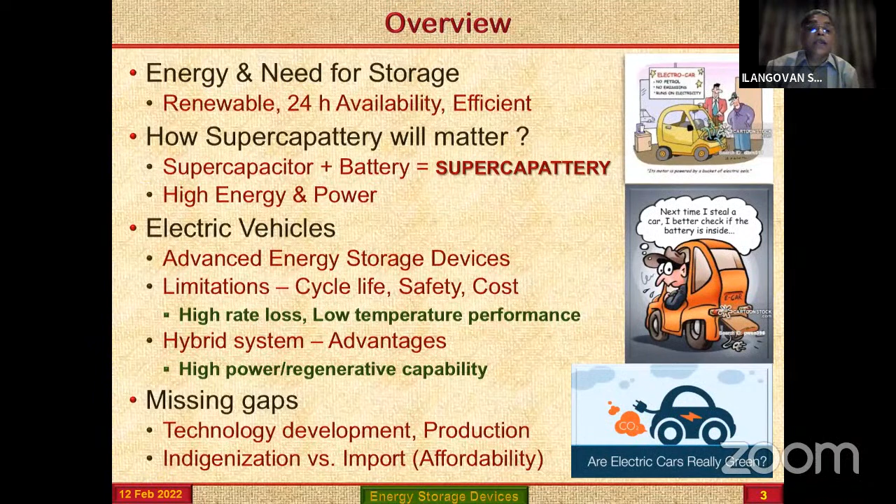Coming to this, energy - human beings started energy consumption from fire, especially for safety purposes as well as for heating. That's how man's sixth sense was using it and started using energy from firewood. Then a group of people - how I am trying to say is how the energy requirement becomes so high and what issues come out of that, I am trying to show in the introduction.

When a group of people joined together, they started using more energy. Then we started employing animals like horses, cows, or oxen to meet human requirements - one horse was equivalent to 21 men. Then that was not sufficient, so we got into industrialization. Equipment came in - tractors, trucks, lorries, then aeroplanes - going beyond about 4,000 men capacity, what we call horsepower, about 750 watts. But unfortunately, when we were using animals for fuel there was no issue; once we started introducing vehicle-based systems, the requirements went up.

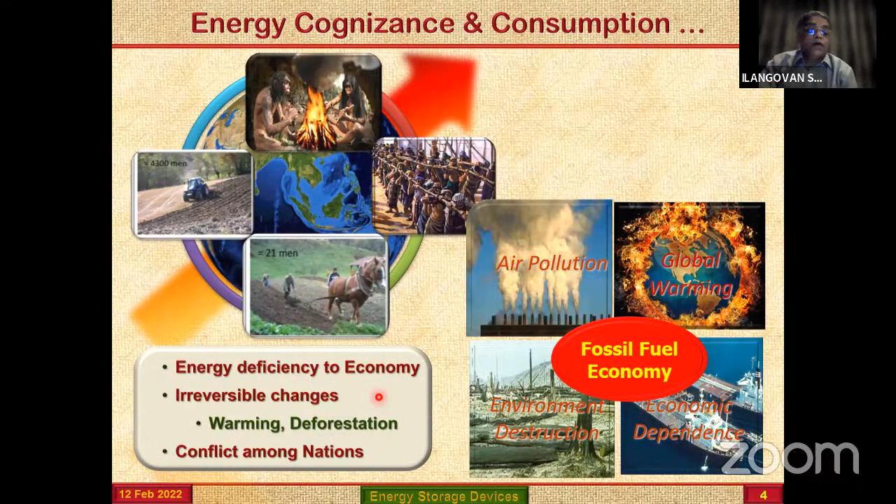All the fuels we were employing were carbon-based, and that has been resulting, over the last one or two decades, in a lot of air pollution, global warming because of the carbon dioxide coming out, environmental destruction, and economic dependence because individual countries have non-availability. All these things have led to controversies around global warming, deforestation, and economic aspects.

When we look at the energy need for the next century, without energy the transportation, electricity, communication, manufacturing, agriculture, and the whole gamut of the spectrum is very wide where the energy requirement is so high. But unfortunately, the 20th century was founded on wealth creation through fossil fuels.

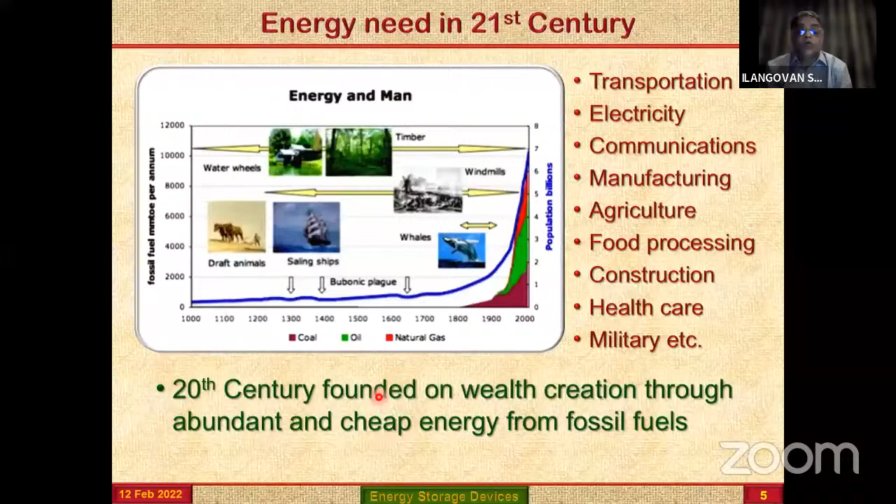Fossil fuels are nothing but coal-based systems. If you look at the distribution of energy consumption over the world, it is transportation, industry, and residential requirements. Now, gadgets as well as mobile phones have also added to that growing demand.

If you look at the bottom curve, up to maybe 1950 the requirements were very less, but from 1950 to 2000 it has gone up, and in the last 20 years it has gone up further. Now population-wise we are nearly about 7.7 billion, and in 2050 we are expected to go to nearly about 9.8 billion.

All these things are requiring energy, and any energy consumption or generation is based on coal. This means tons and tons, gigatons, billions of tons of carbon dioxide will be required in the future to come.

Now it is very difficult. One thing is that coal is dwindling. Another thing is that it has got a negative effect of producing carbon dioxide. Transportation and industrialization is nearly about 60 to 65% based on coal. Now it is time that we have to switch over.

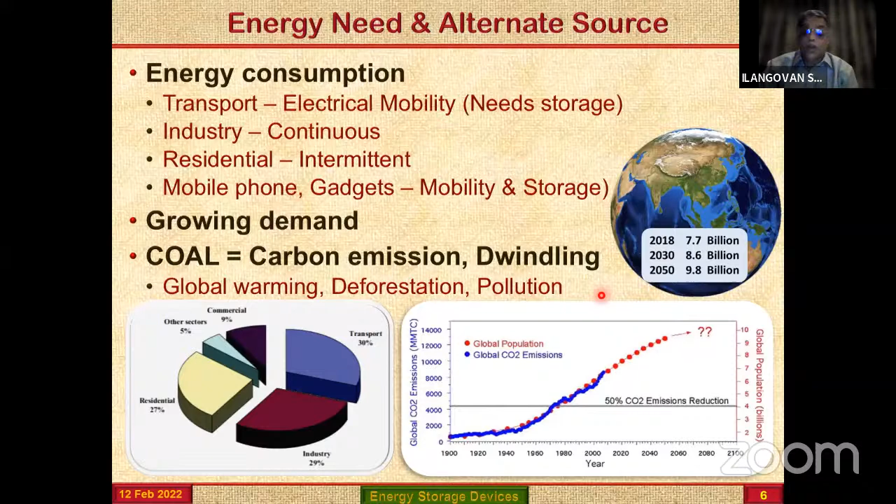If we don't switch over, this is what the condition is going to be. Because countries like USA or China, the population as well as industrialization has gone up without any kind of control. All of this has resulted in the increase of carbon dioxide, mainly nearly about 82% of the energy leading to carbon dioxide production.

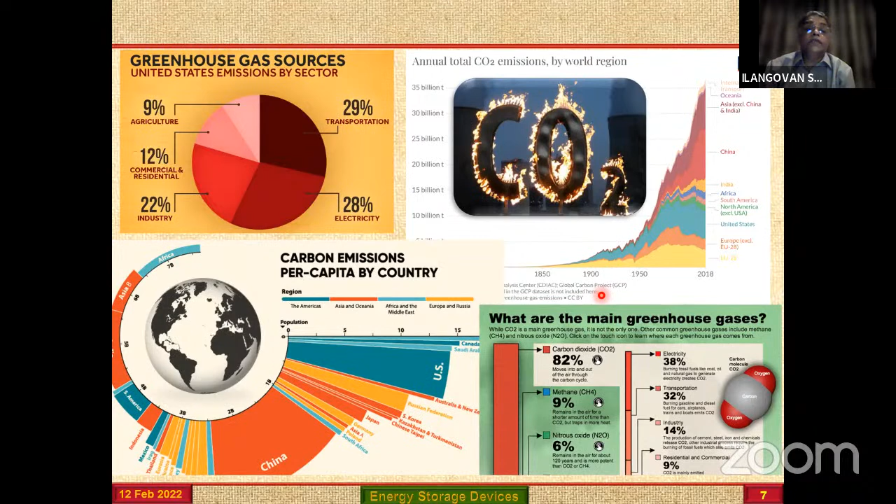These are all the effects that the present generation is facing. If it is allowed, it is going to be a catastrophe for our future. So there is a great requirement that the left side of carbon dioxide production becomes the right side, where the carbon dioxide should be consumed by the trees.

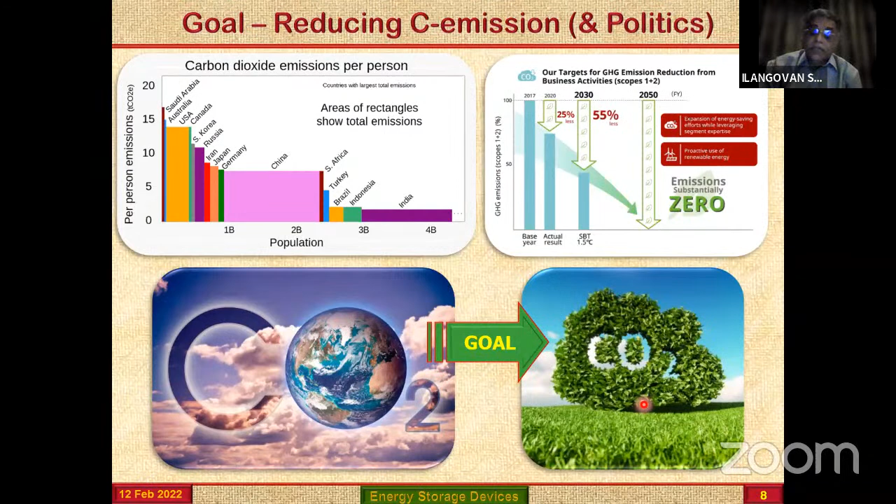So we will have to make afforestation happen, as well as not permit carbon dioxide generation. These are the two goals ahead of us. So if that is so, how are we going to meet the shortage of energy?

If you look at it, the alternative is only lying in nature. It should be environment friendly and sustainable in nature. And definitely it goes without saying that it should be efficient enough that cost effectiveness is always there, so that everybody is able to effectively utilize it as mankind's growth takes place.

If we start from the left, the energy requirement as well as the population both need to be controlled. If you look at the right side top, the solar energy shown in yellow color is about nearly 23,000 terawatts coming up.

Actually we are now using energy at the megawatt and gigawatt level, but another 1,000 times more energy is actually irradiated and impinging or incidentally falling onto the earth at a given instant of time, about 23,000 terawatts. If you look at the other sources, even coal is only on the scale of about 900, and atomic materials like uranium are on the order of 300.

Only we will be able to use natural gas and everything else - they're small enough that they cannot compete with the God-given or continuously available solar. If we are able to convert solar energy in a meaningful way without evolving carbon dioxide, definitely the solution lies in that. We will be able to meet the dwindling nature of fossil fuels, control the carbon dioxide emission - the carbon footprint - and also the global warming, ocean acidity, rise in sea level, and deforestation. All these things we will be in a position to control.

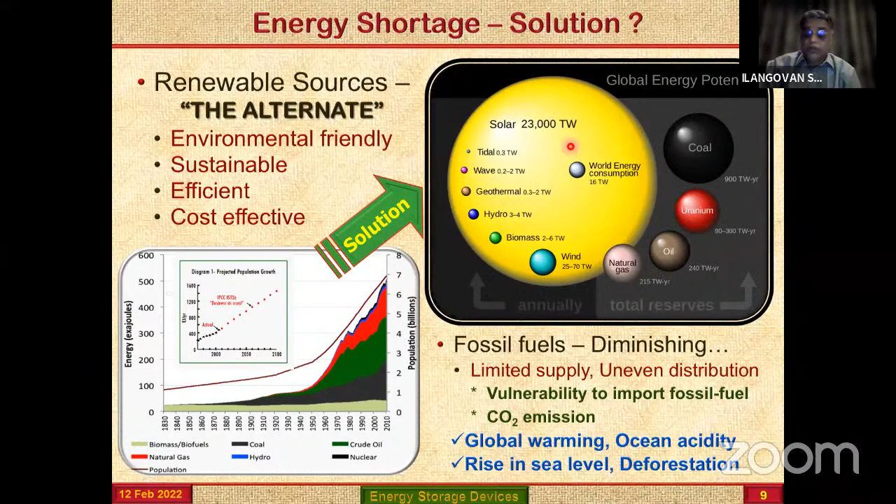But we have several methodologies of storing solar energy. It starts from several energy storage techniques: pumped hydro, thermal energy, compressed air, and definitely electrochemical methods, where I am going to concentrate today. There are some other chemical methodologies also. And mechanically, flywheel kinds of things - when energy is there, we rotate the wheel and the solar energy gets converted into kinetic energy. That kinetic energy can be utilized whenever solar energy is not available, and the magnetic way also we can store it.

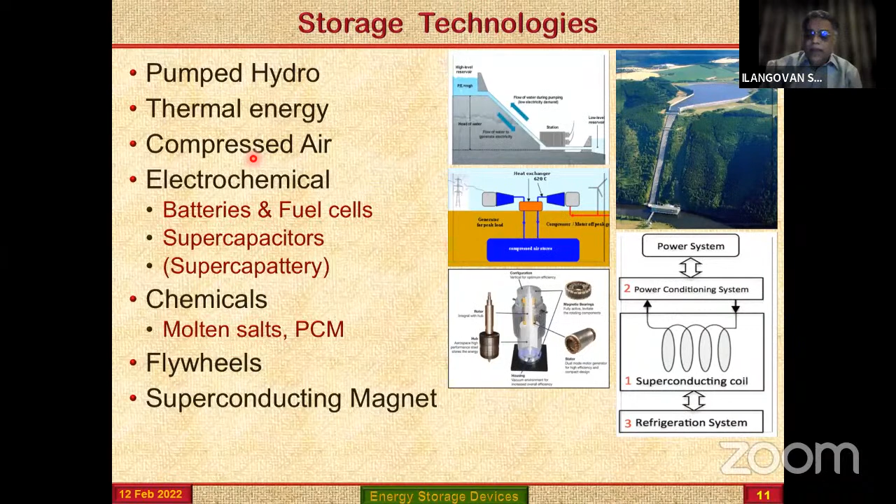But there are problems in storing using all these techniques. One is the capacity - with hydropower and all, we cannot use it at the watts level or hundreds of watts level. When we are on mobile devices - like mobile phones, laptops, electric vehicles or tools - we have to take the energy on mobility, and wherever transmission is not possible, we will have to store the energy and take it.

Smaller powers like mobile or laptop cannot be served from compressed air or pumped hydro storage energy. So automatically, electricity based energy - wherever mobility is involved - is the one which is versatile in form. Especially for mobility purposes, electric utilities become very versatile.

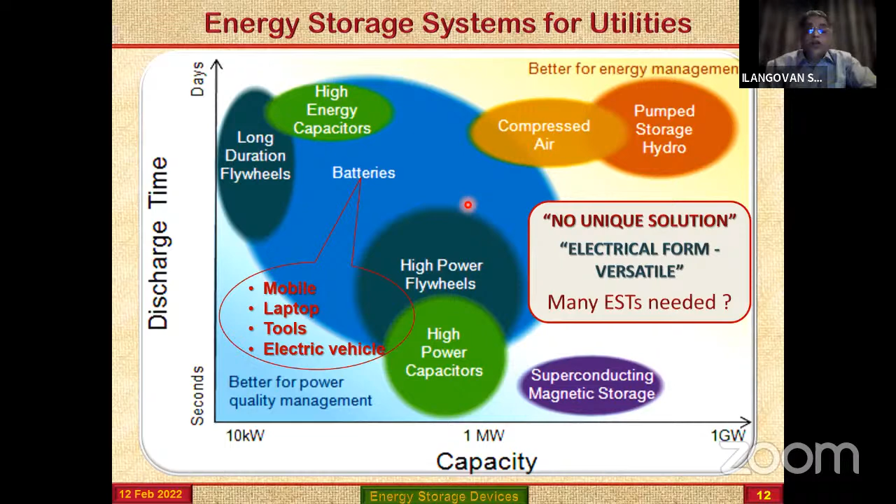In a mobile device, can I carry a compressed air compressor, or pumped hydro energy? It cannot be carried. So they are all good for stationary purposes, but we'll have to draw the line there. Again, when it comes to battery or our electric vehicle, it is not possible.

So a storage system is actually an intermediate step between energy generation and its application - that is how an energy storage system behaves. When it comes especially to renewable energy, it will only be available intermittently, whether wind energy or solar energy - day and night, seasonal requirements, monsoon, climatic conditions will all affect it. So to meet round the clock requirements and peaking demands, the energy storage system should play a key role in continuous supply.

Another requirement is that the efficiency should be very good in converting the energy into some other form and supplying it at a different rate, especially at a higher rate it should be able to supply. The energy storage system should be cost effective, as well as operate in a cyclic mode - as and when the energy is available, it should store it, and then it should deliver it. It becomes a cycle, so there should be no irreversible changes taking place in the energy storage system, which would bring down the efficiency.

So the reliability is definitely going without saying anything. Methodologies are available, as I was telling - mechanical, thermal, electrical, chemical, and hybrid can also be used. But that means the unavoidable nature, it is inevitable to avoid the energy storage.

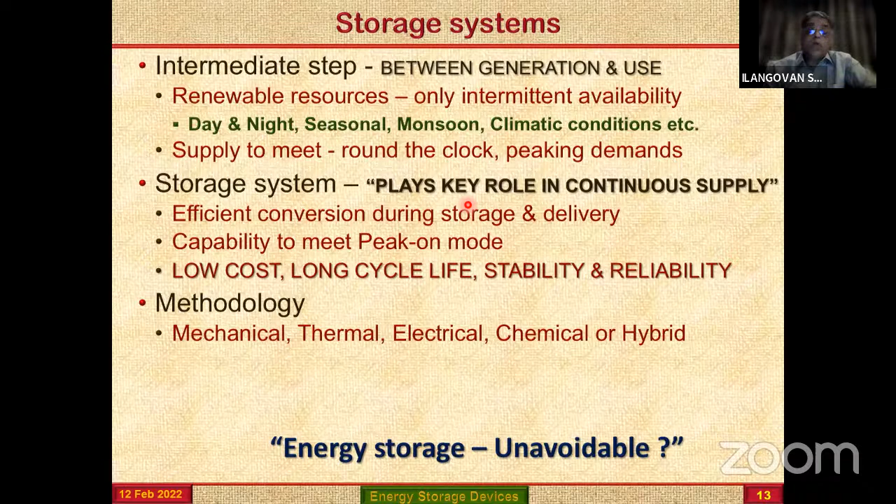We have to store the energy. So these are all kinds of chains. When there is an energy storage medium, it should be able to take it in meaningful ways - accept and convert, and then store it. And it should be able to deliver at the point wherever it is required.

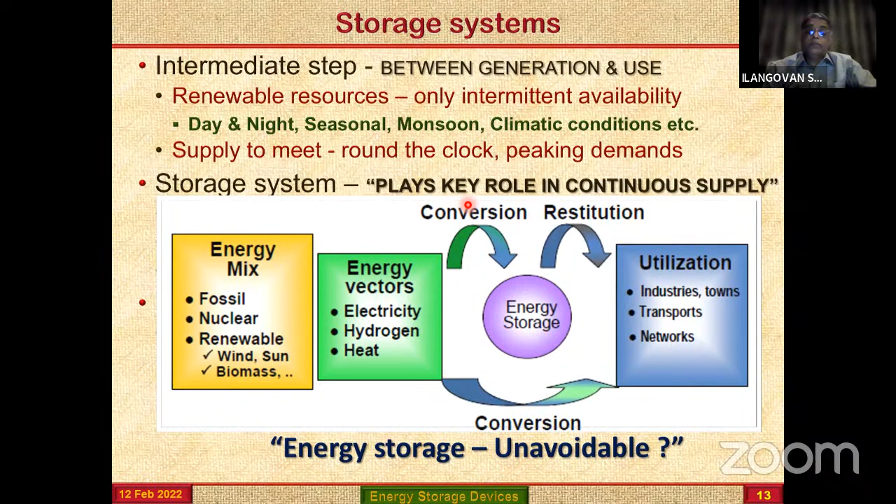So at the tap of a switch, if it is operating, then electricity becomes the easiest way to make it versatile enough. But when it comes to future, the problems are not over with this itself.

In future, our requirements are going to be high, population is going to go up. So that means we should also see that making energy storage systems and selling it itself is not sufficient. We should also give it to individual houses. Now there are efforts going on that solar panels are installed in every house.

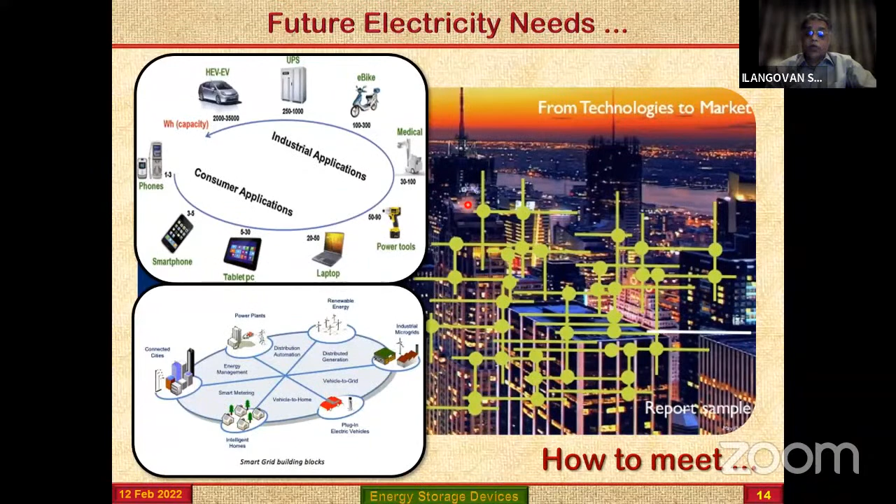There we are able to pump it to the grid also. So wherever excess is there, everybody can generate, everybody can feed it to the energy grid, then everybody can acquire also. That means in future, each consumer will also be a stakeholder. These are all the things about how we are going to meet the requirements.

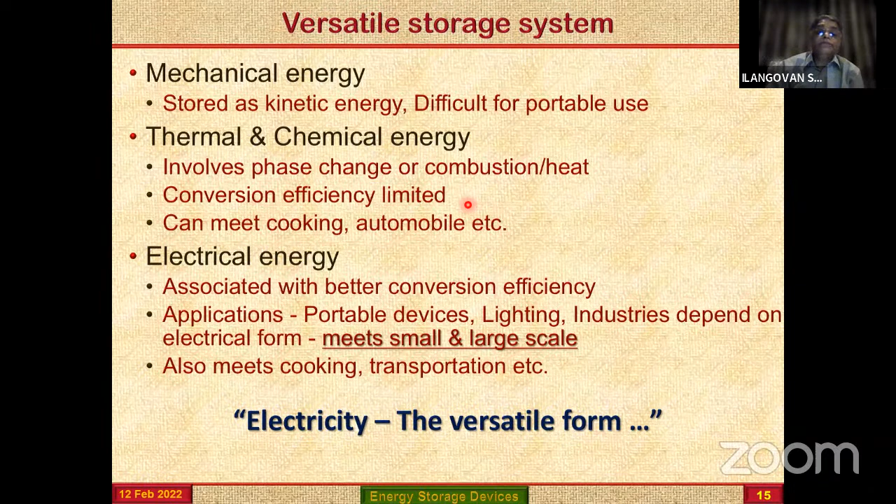As I was pointing out, electricity is the versatile form of utilization energy. So if this is the case, how are we going to start? In India, when it comes to wastages or theft, all these things are to be controlled. That is number one point.

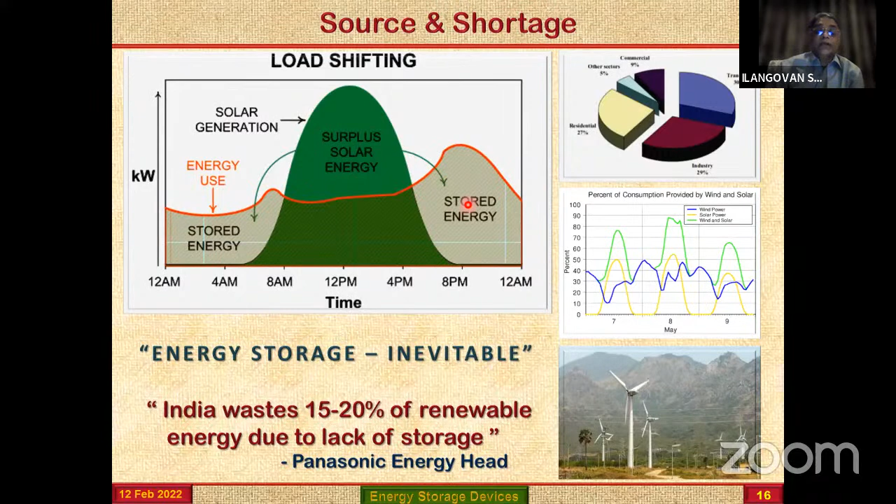So how will we be making our own technologies to see that the wastage is coming down, as well as making it cost affordable. And another thing is that we are making a better living. Technology should be innovative enough so that climate change world over is controlled.

So sourcing the energy, storing the energy, and supply portion - these three S's become now the buzzword for our energy storage requirements.

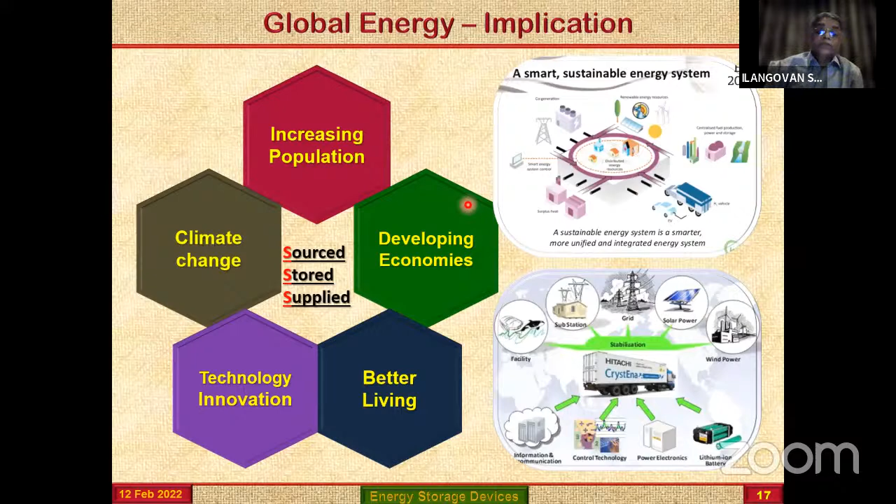And also now, today's importance is that in electric mobility, by going to electric form, are we going to achieve better than what the IC engine - internal combustion engine - is doing? Definitely it is going to be better, because the amount of energy we use in IC is only about maximum 30%, or 25 to 30%.

At the same time, when we use electricity storage based - either it is in a fuel cell, a battery, or a supercapacitor - the electric motor, the traction motor, is much more efficient, nearly about 80% or 70% we will be able to convert. It will also be more efficient, silent, and carbon dioxide free. That kind of ignition or knocking aspect will not be there.

And the deficiency portion is that the cost presently is very high - that is the present problem. How we are going to reduce the cost, how we are going to make the technology, is some of my thinking process. I know the variety of people from mechanical, electrical, chemical, civil engineering will be there. So if I go into a little more chemistry, please don't worry - that is not going to affect your understanding.

As I was telling, the country is taking up new initiatives like a 15-year roadmap we have put up from 2016 onwards to 2030. India will save nearly about 60 billion in energy cost by about 2030. That is the proposal.

Each 1 gigaton - we are talking about 35 to 40 gigaton of carbon emission taking place every time - and 1 gigaton reduction is about a 37% drop in carbon dioxide generation. So by going this way, electricity based, mobility based, we will be in a position to save energy of the order of about 60% in 2030, while also bringing down carbon dioxide emission.

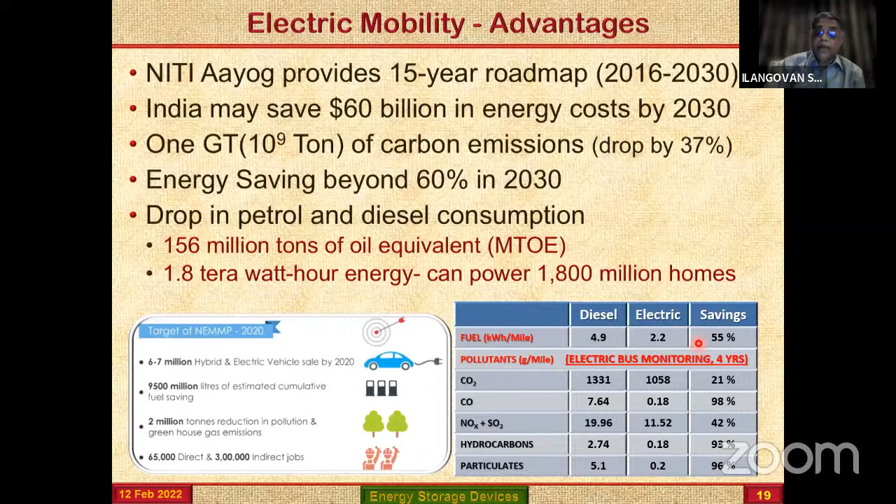We have a very good advantage by going to electric mobility. So cost wise, if I look at it, this is a table which is making a lot of alarm bells for us. Some of the red curves I have put now, cost wise, the Volvo bus now it is 88 lakhs, Tata non-AC it is about 33 lakhs, and the next one it is 30 lakhs. Next one it goes to about 1.2 crores, 2 crores, 3 crores. Electric bus and all, it is going to be of this 2 to 3 crores level.

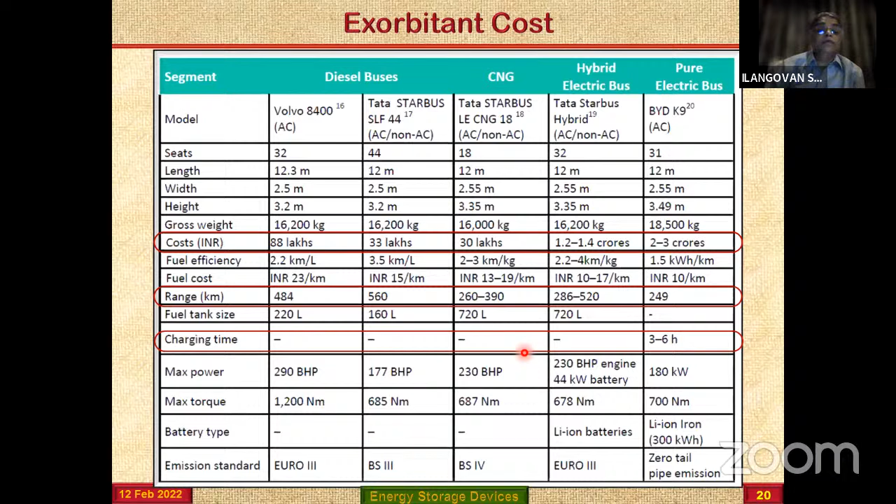But range wise, if you look at it, nearly this is about 400, 500 kilometers only, and charging time is also going to be long enough. So that way, if you look at it, the cost is very, very high. How we are going to bring down the cost is the main problem. And even if you are bringing down the cost, whether the present systems are going to be versatile or reliable, or do we have the affordability for doing such things? Like we have hydrogen fuel cell, battery electric vehicle, hybrid also we can have, biofuels. So either we produce alternatives, or there is no doubt that global warming is likely to perish humankind.

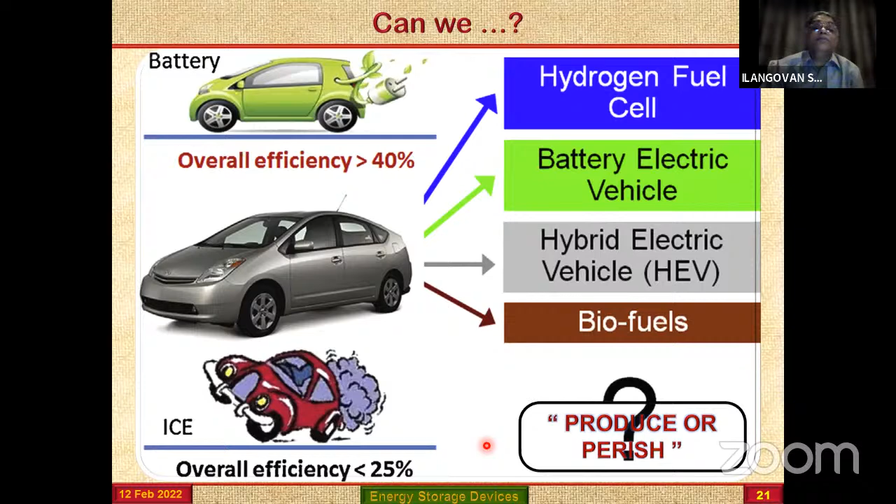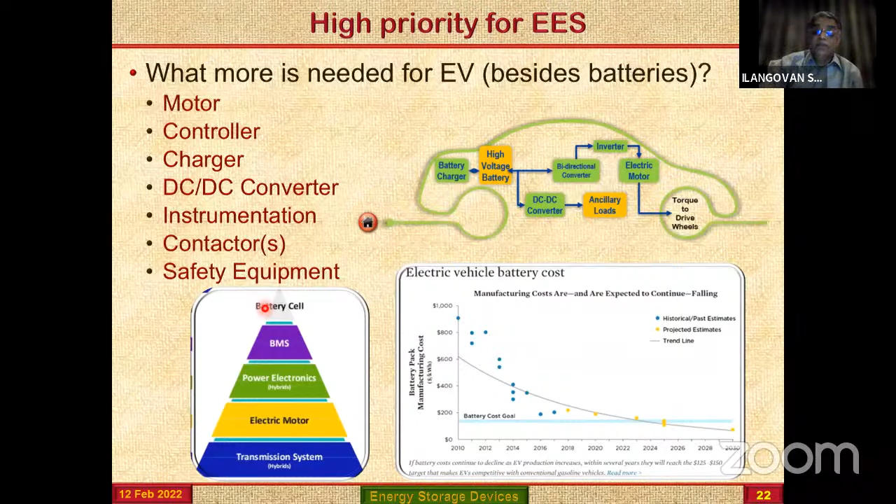So if that is the case, if I just look at the components which are associated with electric vehicles, it starts from a motor, and then the electronics. Without electronics, the motor cannot be controlled, and there should be a charger, and a DC-DC converter is required. Some instruments and switches are required. Safety equipment is required. But if you see the triangle, the cost of the battery stays at the top. So 50% of the cost goes for the remaining aspects, but 50% of the remaining cost is actually consumed by the battery, and weight wise also it is heavy enough now. So these are the points which we'll have to address.

So now comes the comparison. What is the power density, the rate at which it will be able to deliver, which for any storage system is a requirement, and what is the quantity of energy it is able to store. So if I look at it, capacitors where the energy is less, the rate is possible. But as the energy density goes up, the power density comes down. Its ability to drive or deliver meets the requirements.

Suppose if I'm going in a vehicle, the battery, if I don't have the peak energy supply, I will be going at only 30 kilometer, 20 kilometer per hour speed. But capacitor, if I use it, it will go at 60 kilometer or 80 kilometer speed, but it will last for only minutes. So this is how, like in Tamil we used to say: power is there, energy is not there. If energy is there, power is not there. So this is the problem with the present energy storage systems.

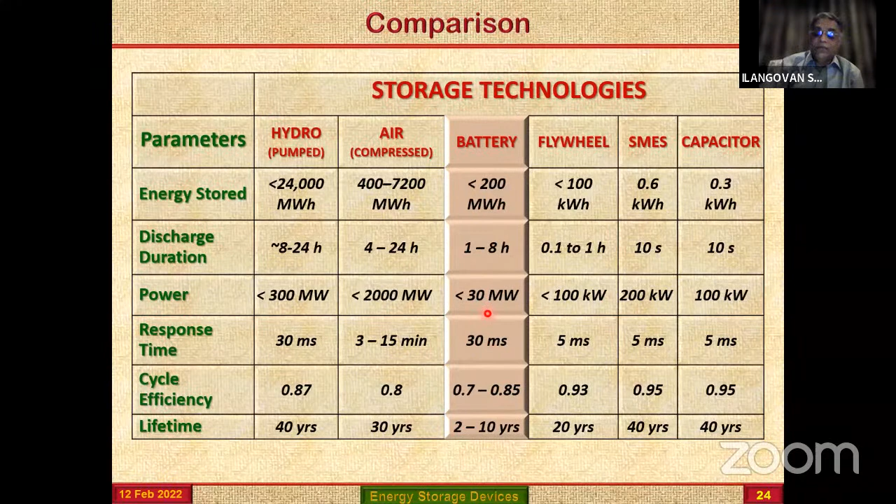So let me start with the lithium ion rechargeable battery, which has created a revolution when compared to our lead acid battery or nickel cadmium or any such batteries where 20 to 30 watt-hour per kilogram was there. With lithium ion presently we are able to touch about 150, and there is scope for us to improve further to the level of about 250 and further 500. But whether increasing the energy efficiency alone will be able to meet our requirement or not is the point.

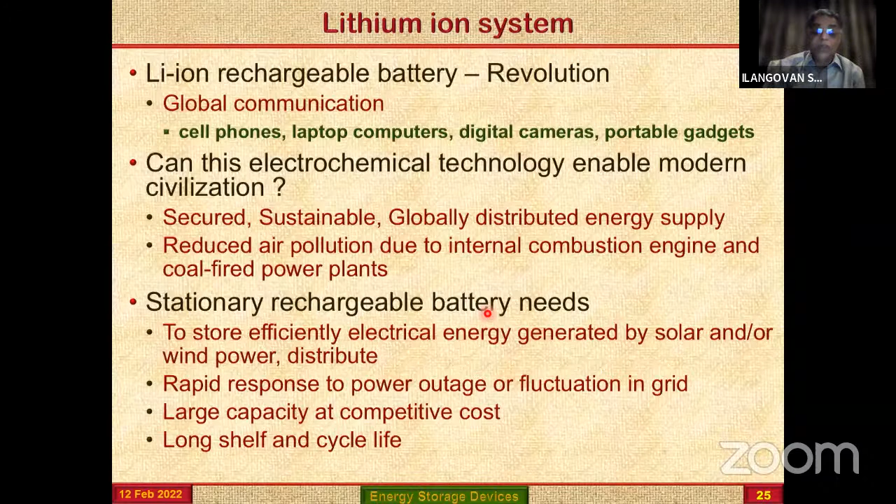There will be an electron. Once one of the electrodes consumes the electron, the other electrode will be delivering the electron. That's how the electron balance takes place in any battery. The opposite happens when we are charging, the current flow will be in the opposite direction. So I will not go beyond that with respect to battery operation.

So let me come to how the battery is made. Battery is not kind of a big thing, it is all some set of powders which we start with, whether it is anode material or cathode material. There are some binder materials used, and then copper, aluminum kind of materials are used. Otherwise some salt materials are dissolved in the solvent to form the electrolyte. So anode, cathode, and electrolyte, these are the essential items.

The aluminum or other stainless steel materials form the cell case. So the main things taking part in the active charge discharge reactions are about 5 or 6 powder materials which are very essential to meet the cycle life as well as deliver the energy per unit volume as well as unit weight.

So that's how normally we call this particles to battery. These are the few particles which are very important to make the active charge discharge and long life, cost, energy level like that. So now that the basic technology is available, we are making the positive electrode, negative electrode.

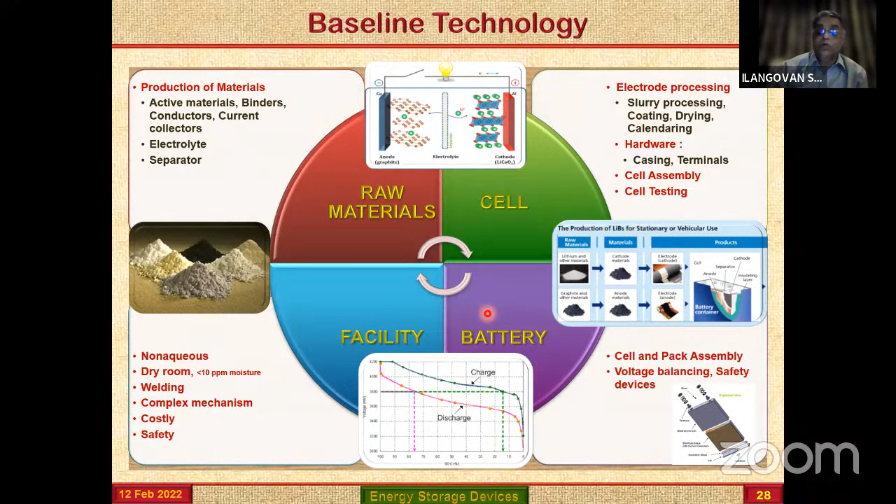We'll have to supply this energy as well as for mobile phones or electric vehicles for transportation with respect to bus, truck, or nowadays we are also talking about electrification of the aeroplane as well as the ship. So are we in a position that with the available technology, is it possible to completely meet the shortage? That's what I am trying to address today.

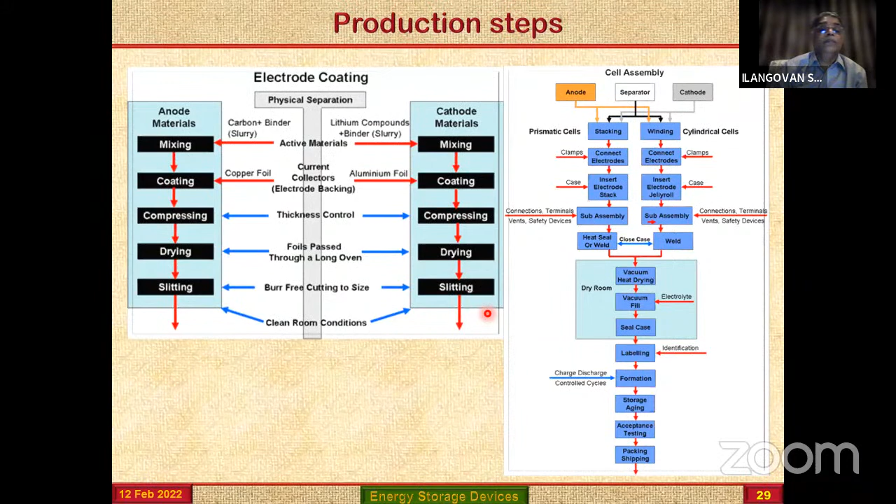So these are all the capabilities that we have achieved. The capability for technology is there, but making it more and more engineering oriented and cost effective, whether raw material is available completely with us, are we in a position to make manufacturing units within the country?

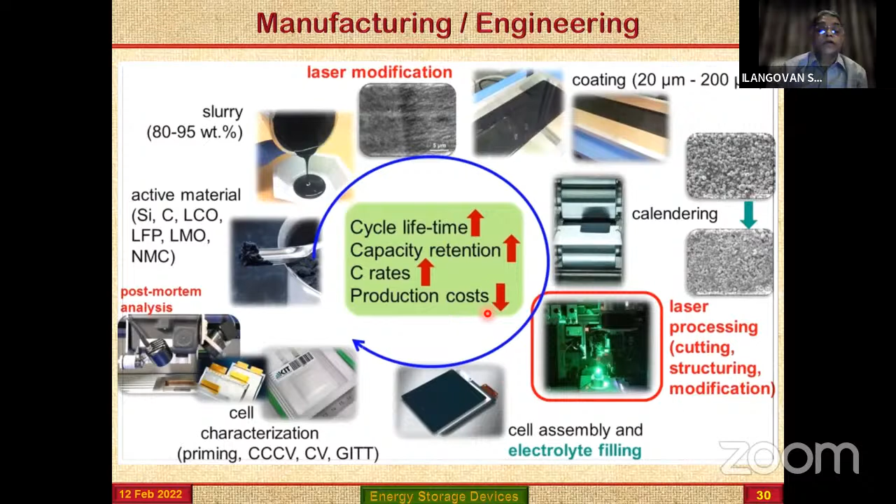When we come to that, not only within the country, anywhere else also, even the Tesla car, whatever we are taking in our Indian market, it is going to nearly 80 or 90 lakhs and crores level only it is going. But if you are depending on import technology, will we be in a position to meet that requirement? And what are the means and ways?

So now when I look at it, I will have to compare between the ICE, internal combustion engine, what is the energy available and what is the power. Then I will understand where is the gap and how we are going to meet that gap.

So if I look at it, the IC engine is about 2,500 watt per kilogram. Continuously, as long as we are continuously supplying the fuel, it will be generating the power. But no way the energy systems are near to meet this requirement.

So we'll have to increase the battery power, or the capacitor energy should come to this level. Is it possible with the existing technology, or even in future, whatever we are proposing, are we in a position to meet that requirement in a cost effective way? If I look at it, it becomes a little jittery. So how we will actually be looking at and how the whole world is going, I'll just show.

If I increase the energy alone, see presently the lithium ion is somewhere around 250-300, the lithium polymer from about 250 I can still stretch, and lithium metal I can take it to nearly 500 watt per kilogram. But even then, the energy is there, the power requirement is not there.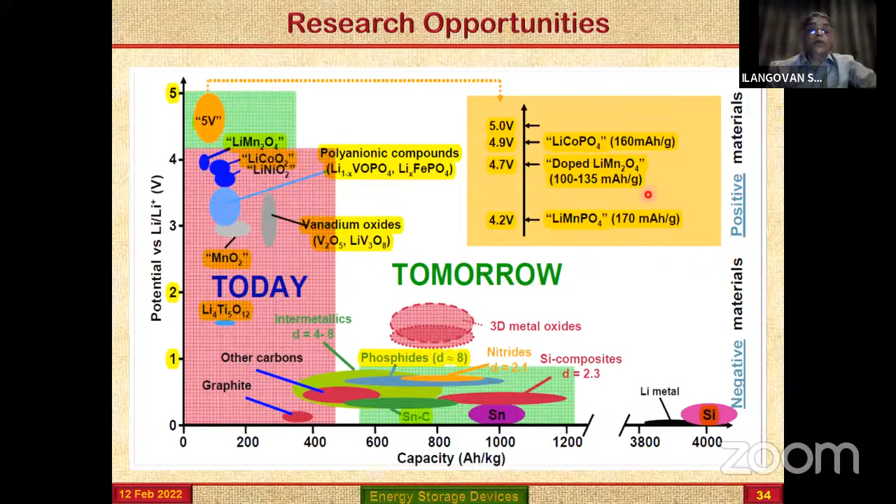There are promising materials which show even 5 volt batteries we can bring out, like cobalt phosphate or different kinds of materials, and silicon based raw materials for anode, still it will be able to provide better energy. But whether better energy alone is sufficient, when I look at it, yes.

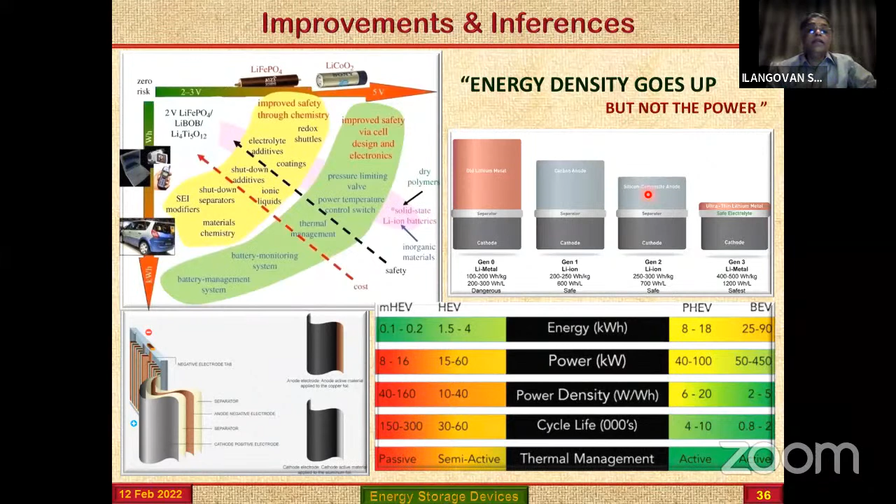So we will be able to make energy density available. But what about the power density? If you look at the power density, the batteries are still lacking. The energy density goes, but not the power.

Because when I look at it chemically, what is the problem with the battery? Is it slow? Yes, it is slow. If I look at the kinetics, this is the micro arrangement in the battery. There will be the binder, there will be a kind of conducting materials like carbon. The ions are to move, even in that 200 micron thickness, whatever we are using as a coating material in the electrode, it has to travel a long way. Each electron or charge, it should travel a long way, so suddenly we will not be able to increase the power.

So that power increase, if I do, what will happen? See, just look at it. If I am drawing a battery over 10 hours, I will get this much capacity. You can see the voltage, and time-wise also about 10 hours it will be able to give. Just I increase it to maybe about 5 times, automatically the 10 will become here. But you see, this much energy will be lost in that discharge time. So if we go to 2C, definitely I will be able to sustain it for only about 20 to 30 minutes. So this is the problem when I increase the rate at which power, the energy that is stored inside is not fully coming out.

So the efficiency of delivery, the supply comes down. Then another issue is that India is a country where we start from nearly about 30 degrees, 40 degrees, and if you go north it is 5 degrees, 0 degree level it will go. So temperature dependence also is there. So if you see the energy, or the area under the curve, there is nearly only half of the energy only will be available. These are all the issues where we are finding it difficult.

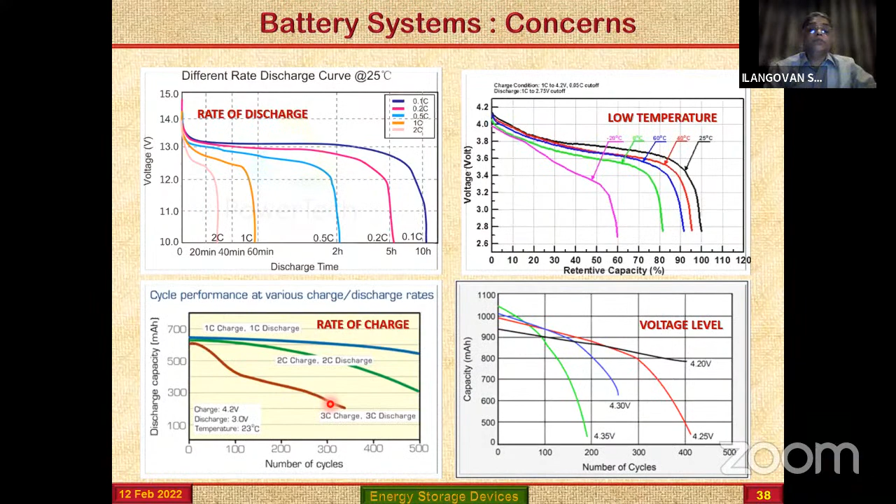Why? See, there is an open circuit voltage. There is a resistance associated with the battery when we are discharging at a higher rate. If the rate goes up, the resistance felt is also increased because it is I times R. All of us will understand that the I times it goes up. This is the one which causes, when I'm doing it at a higher rate, the voltage coming down, because I times the resistance will go up. That's how I into R will become the voltage portion. I square R will also be adding to another parameter. So this is the one which causes the internal heating.

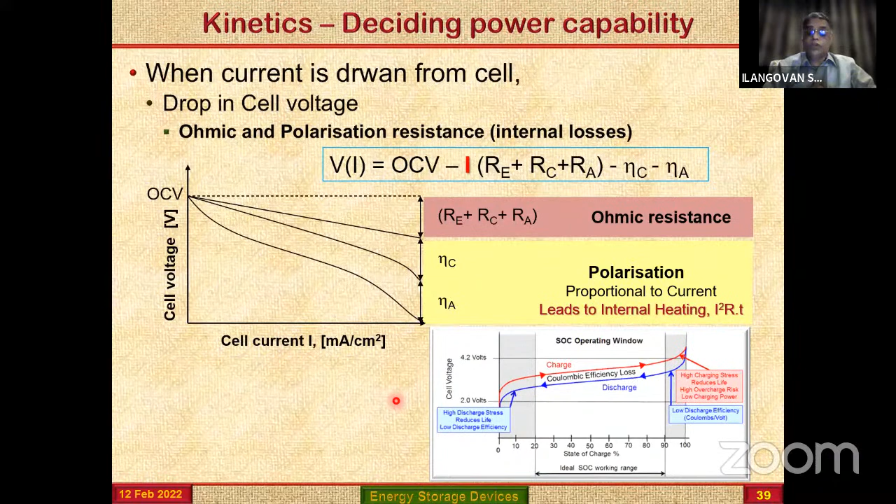Energy efficiency comes down, the life cycle comes down, the cost per unit energy, that is our kilowatt hour wise, when you look at it, goes up when I'm doing it at peak current. But any application, without peak current, I will not be in a position to use it. So these are all the issues when I was citing out.

So when I see the actual electric vehicle, this is the way the power requirement is there. The red is the one during acceleration, the blue curve is when we are doing it in the normal mode, gear changes only. But when I'm accelerating, the power rating goes to a level of nearly 3 or 4 times.

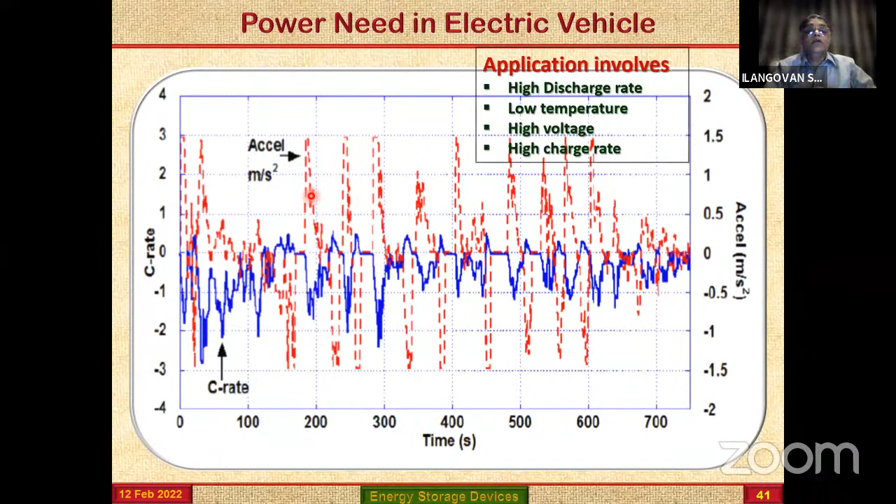It is always the peak power requirement. So these are all the peaks which are going to cause the problem in the battery during our operation. That's how the cycle life comes down in the battery. So what are we going to do?

A new energy device was brought out. That energy device was nothing but a supercapacitor. That supercapacitor has all the power. Unfortunately, since the power is there, the energy loading in it is very poor, because it is only getting stored on the interface.

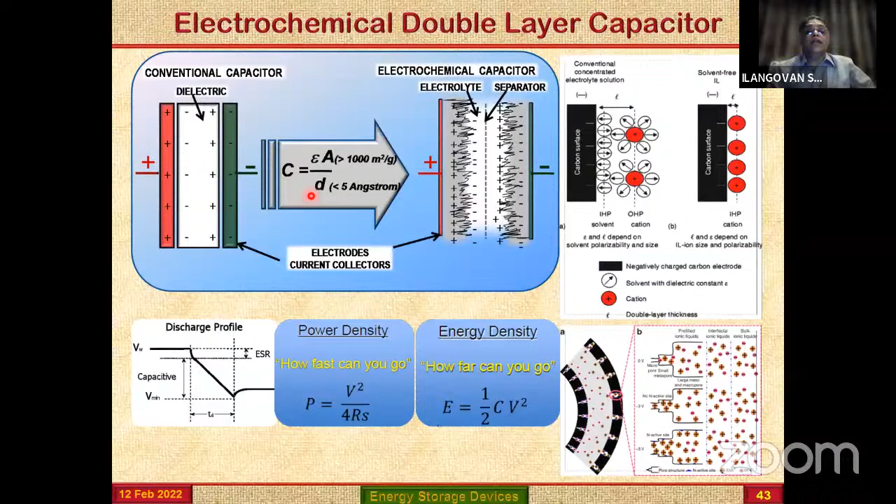So something like that. If I use the ultra capacitor now, like a rabbit, it will go fast for a short duration and then take rest. But the battery will be going at the speed of a tortoise only. It will be like a rabbit in the ultra capacitor's capability, and in the battery it will go for a long duration, but it will only go slowly. So this is the problem.

How we are going to unite these two is the crux of the day, how we will be able to do it. Otherwise, supercapacitor for short duration applications is very good. It is able to sustain nicely pulses, like when I'm having a drill gun, the pyro elements. So that means it has got short duration capability. If something is able to charge it intermittently, that is the jinx we would have solved.

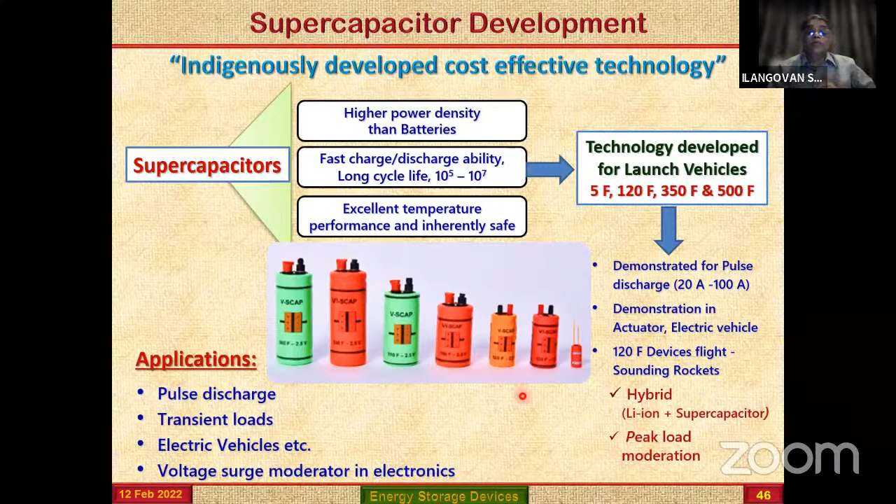So when we cycled it, unlike batteries which give about 1000 cycles, we could touch nearly 7 lakh cycles. Even at 80% the energy it was able to maintain, meaning 20% variation. Normally that is our cutoff value, but with 20% loss, nearly 7 lakh cycles it is able to give. So even short circuit protection is there.

So these are all our routine tests that we'll have to do, because in aerospace, always 50% of the time is for development, and more than 50% of the time our supervisors guide us on how we should be doing the tests, how to develop things, and how to qualify the items. Qualifying the item takes much more time. So once we qualify for our aerospace requirements, definitely the requirements for our terrestrial applications will be easily met.

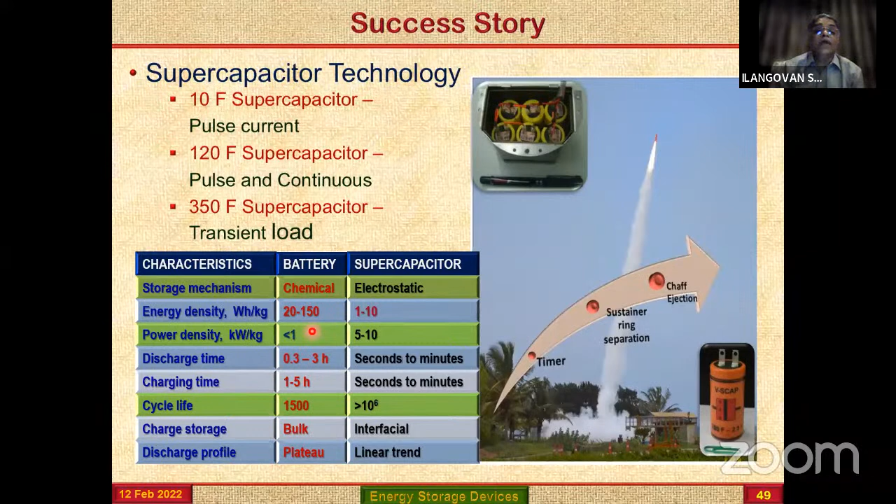So we could use it in our rocket. In supercapacitor technology, it was used well, but that doesn't mean supercapacitors can power any small vehicles. But in other countries, even the metros get charged for every kilometer. Whether Germany, Hong Kong, or Japan, all are using electric metro trains where at each stop it gets charged. So now it is a good thing. But that means for our truck or lorry, we cannot do such a thing. So what are we going to do?

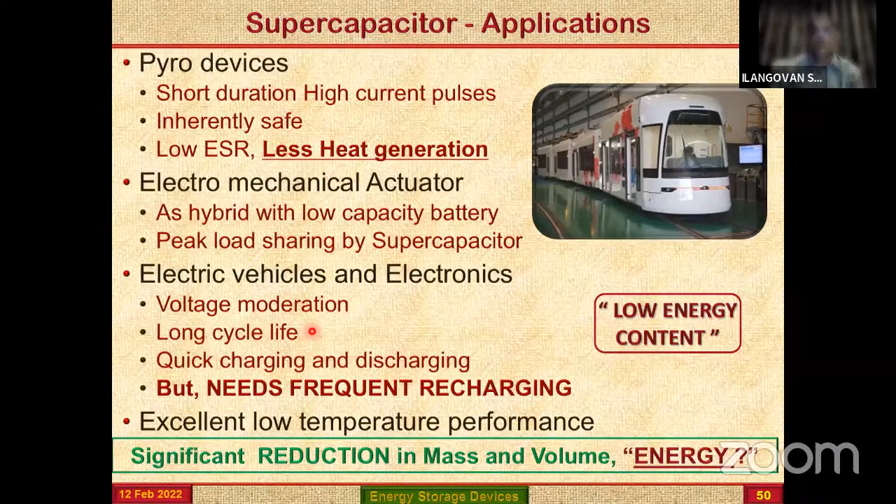Significant reduction in mass and volume will also happen because of such arrangements. Other than this, the applications extend to many varieties of things, starting from marines or submarines, or railways. We will be able to use this supercapacitor in line with battery everywhere.

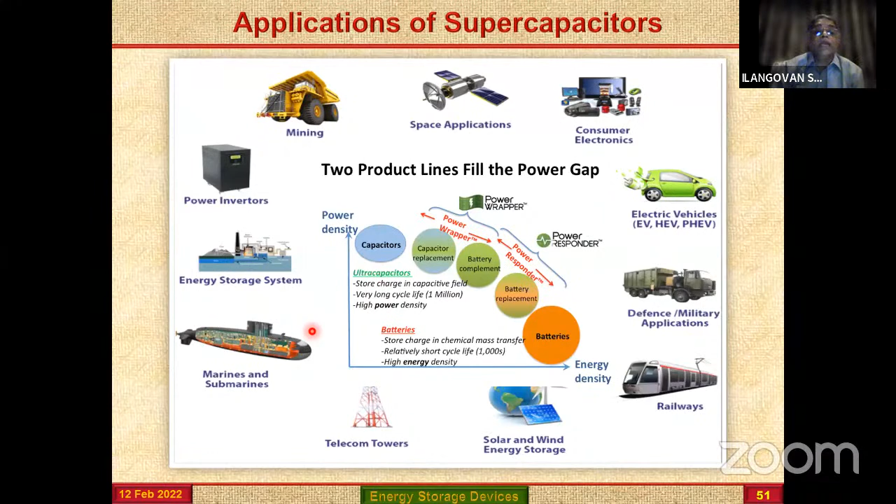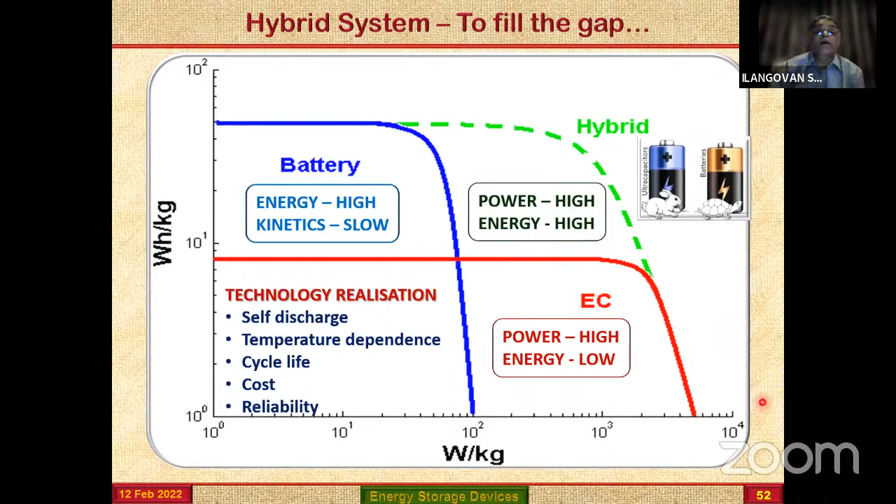So this is how we could get the confidence. The combination of technology helps in meeting the peak requirement as and when it is required. The transient power requirements are met by the capacitor, and the continuous charging, the supercapacitor, and maintaining the low level current, the battery is able to do.

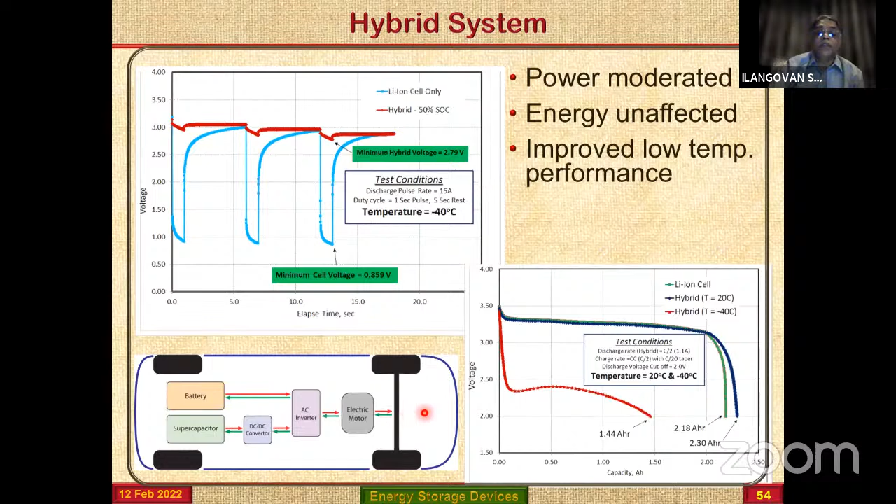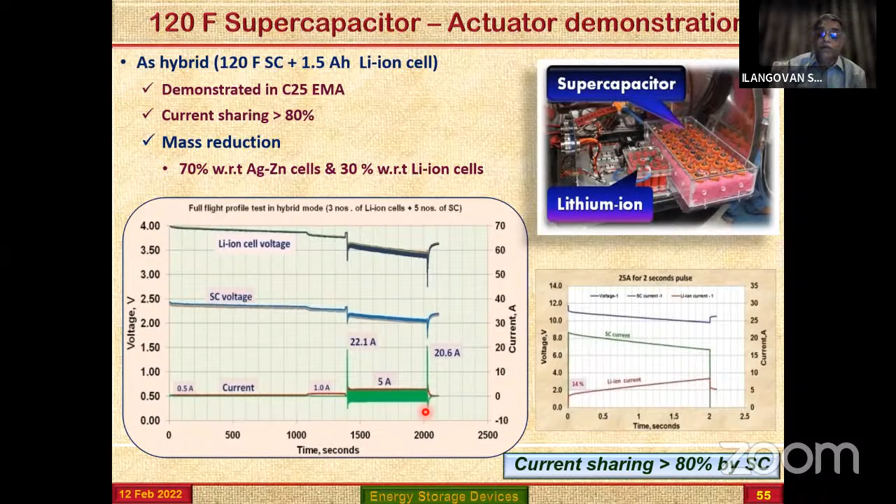So if I'm able to have the battery plus supercapacitor through a DC-DC converter, we will have very good power capability. There are other advantages too, which we also tried for our electromechanical actuator - even a small capacitor was able to give about 20 ampere. So we demonstrated it, and now we are trying to implement this in our launch vehicles also.

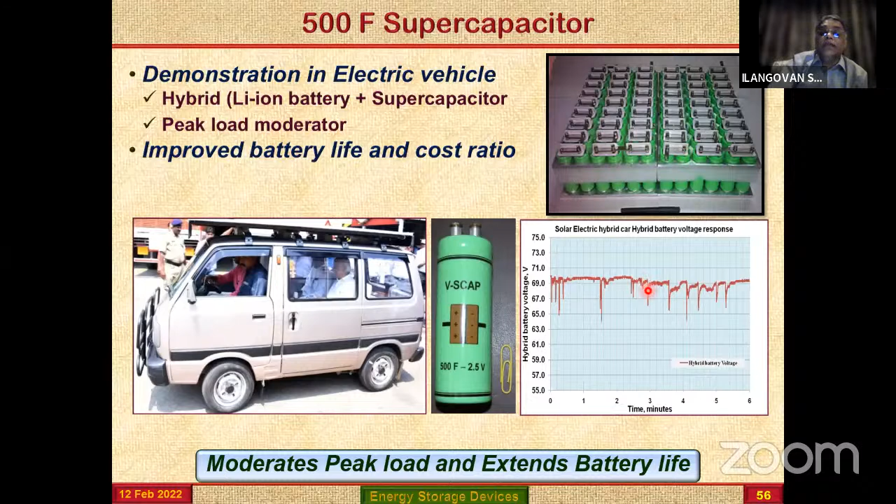To demonstrate, we also added a bank of supercapacitors in a small car. Inside, sitting were our Dr. K. Sivan, former chairman, and Dr. Kiran Kumar, who preceded him. With the supercapacitor and battery, and a solar panel also sitting on top, we put this into a Maruti van, and you can see the peak currents have all been controlled, and the battery voltage as well as the hybrid voltage was very high. So this was providing very high confidence. We also measured, as I was telling, this was the peak.

So if you have the battery and the supercapacitor, the values are taken care of very much. With battery alone, a lot of peaks are there. With the hybrid battery plus supercapacitor, you can just look at it, we are having a very clean curve, which is not having any peak power issues. This will solve the problem of cost, or at least reduce the cost, and also give long cycle life. So this is how we could gain the confidence.

Now another aspect is that when I'm having such a supercapacitor in this, when we are going up we will be needing peak currents, and when we apply brake there will be back EMF coming up. Because the supercapacitor can take the energy fast, it can store it also. To the extent of about 10 to 15%, we will be able to save the energy by recuperating it through back EMF and recharging the supercapacitor.

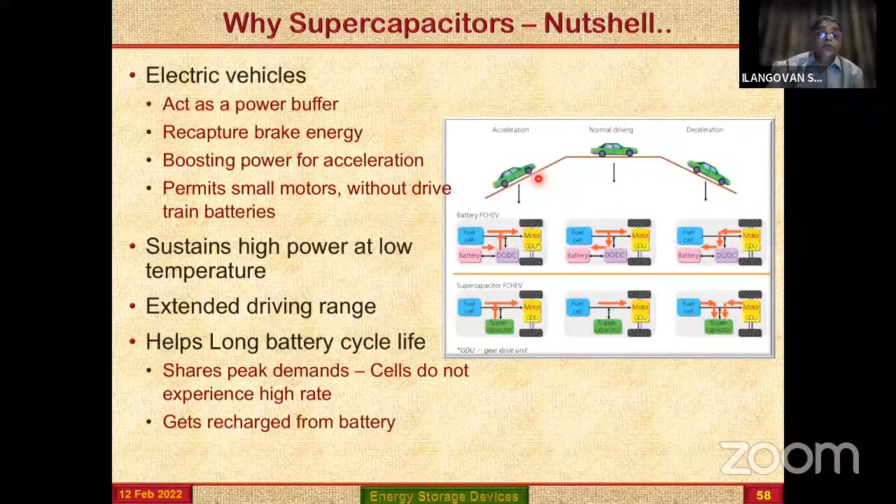One is that the big peak demand is met with, battery is not facing the big demand. So now we try to combine these two technologies in a single device. That was the crux that we have broken, and we have taken a patent also in this direction for the first time. So this is our new contribution.

These two are the anode and the cathode, and on the supercapacitor side we have taken the cathode portion alone. We combined it with the battery halfway, so that way we could increase it. This is how the supercapacitor and battery combine - supercap and battery - that's why we call it a supercapattery, or supercabattery. Both energy as well as power aspects are met with.

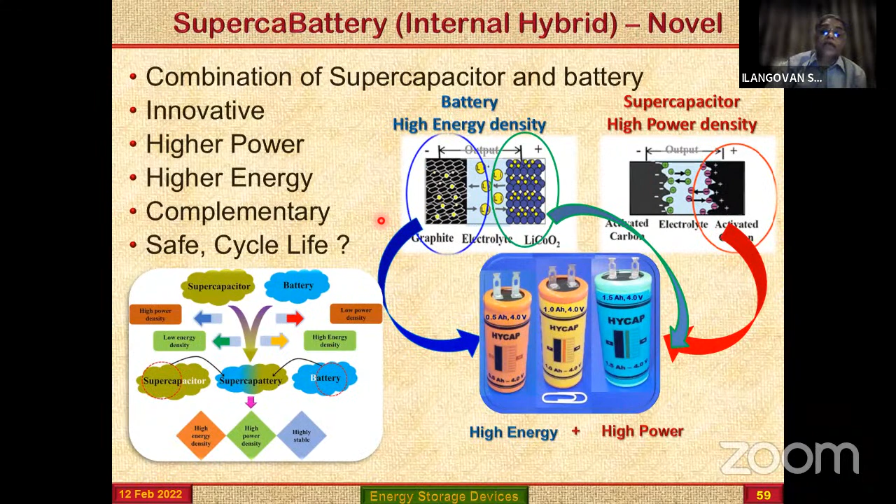Definitely it becomes safe, long cycle life is envisaged, and also the peak power aspect is met with. So definitely with battery and supercapacitor, current peaks are reduced, that is voltage drop is reduced to the extent of nearly about 50%, and the cost reduction, as I was telling you, is there.

Supercapacitor based and battery based supercapacitor, again we tested it, we are getting a very good advantage. Even a 1 ampere hour cell, 1 Ah supercabattery is able to deliver about 40 ampere peak, and still the cell voltage is well above the cutoff value. If we start with a 1 Ah battery, otherwise it will not go even for 2 ampere peak current.

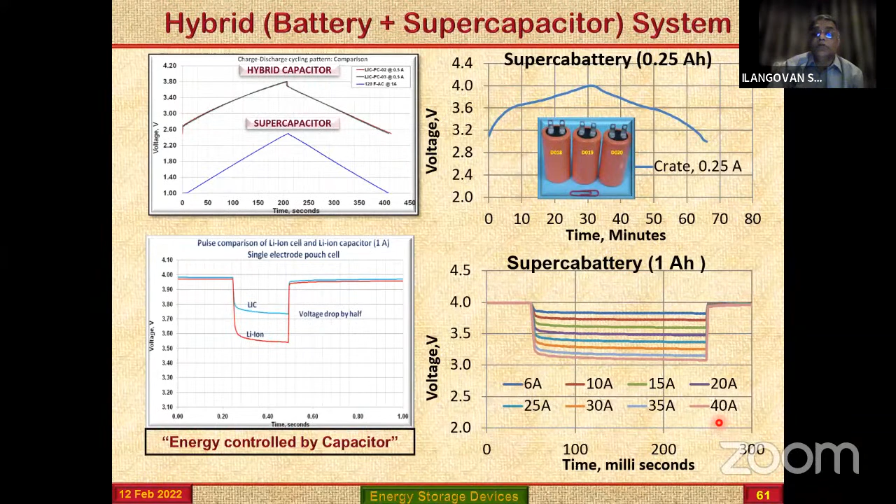We are able to get pulse-wise nearly about 200 milliseconds, 2 second level we have done it. This is 200 millisecond level for our pyro application. For the 2 second also we have done up to, even we are able to get a 60C and 40C rate. So comparison-wise, now the third device has come up - battery, supercapacitor, and hybrid supercapacitor. When we look at it, we made the device, and in place of silver zinc what we are using is capacitor, and there is a lot of weight saving plus high power pulse.

So if you see this curve, it's better than the supercapacitor as well as the battery level. This is how it becomes complementary. Supercapacitor energy is increased, battery power is increased when I'm making it in a single device, and I don't need to connect them in parallel where voltage difference comes and issues arise. So this is how we have come up with a new system.

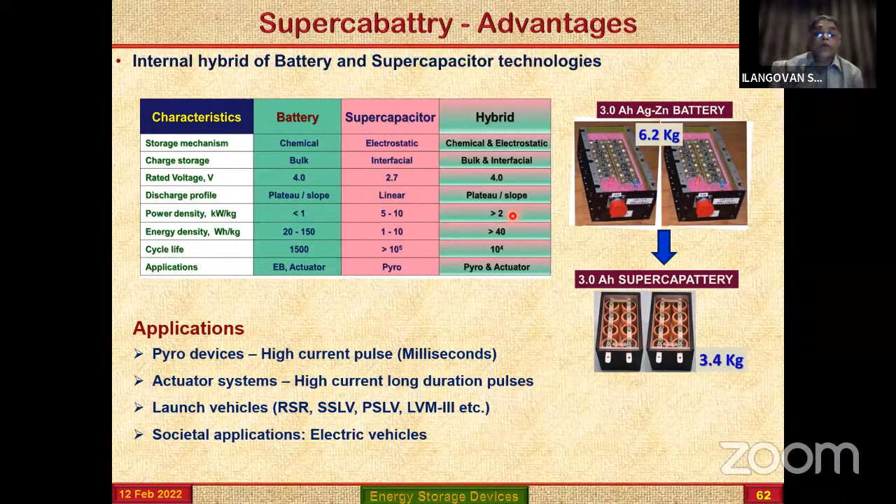As I was telling, we were doing all the charge, discharge, overcharge, cycling at different rates. This is the 100 ampere pulse over 200 milliseconds we were doing. The short circuit also, even the 3 Ah cell is able to deliver nearly about 400, showing the peak capabilities very well, equivalent to self-discharge performance. All those things are much better when compared to the supercapacitor to lithium-ion level.

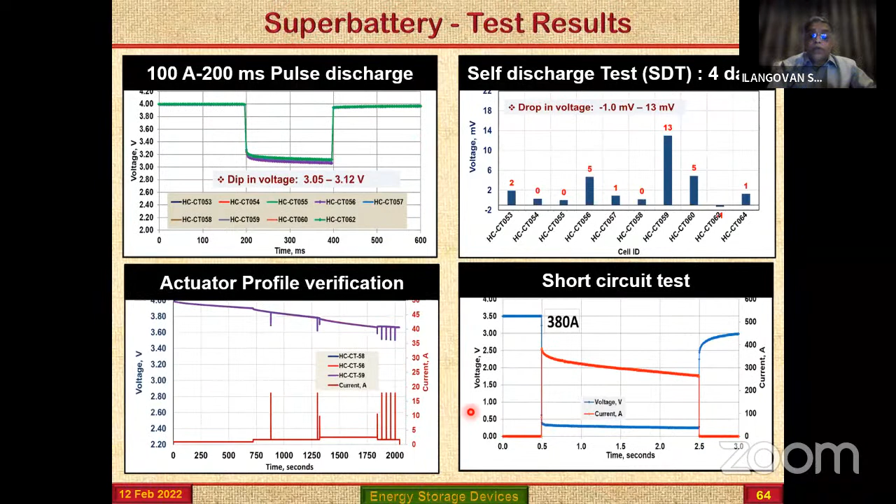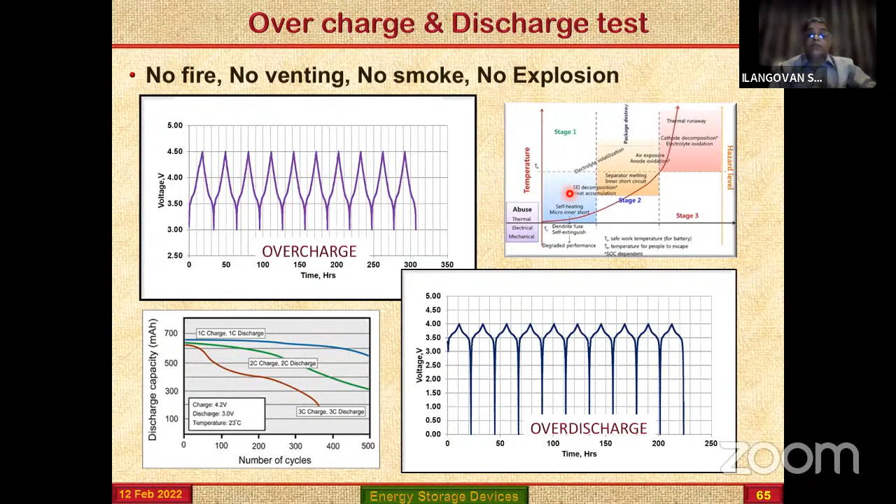If you look at it here, even this 1 Ah thing is able to meet nearly several pulses of 20 ampere pulses. We were able to demonstrate, and here this is the routine type. What I was showing, like the peak, when I am increasing the current, the peak current coming down is well solved, and temperature-wise also at low temperature it is able to give very good performance, and it is able to sustain overcharge as well as over discharge. This is the important factor which I am trying to tell you.

Within 200 milliseconds it is able to give 60 times the capacity of the cell. Even for 2 seconds, we have done up to 40 C, it is able to deliver. And you see continuously, this is the current pulse adjacently given, and the battery is for 3 to 4 volts. We are able to get nearly 800 pulses without any recharge.

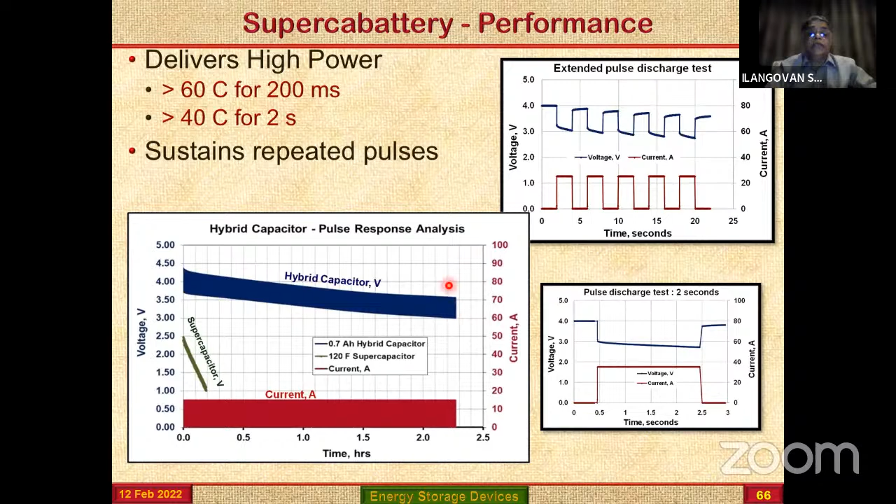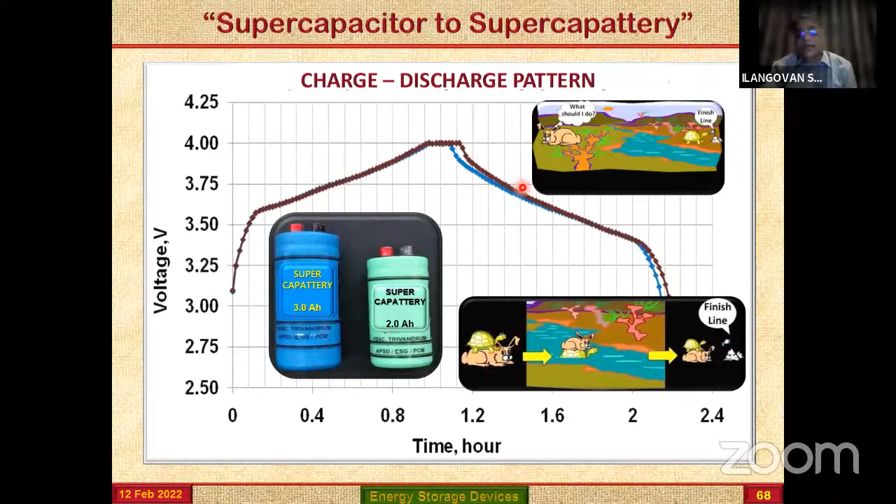So now, what was I telling about our management philosophy? The tortoise and the rabbit, how they used to be at first. What should happen when there is water, or speed, when it has to go? When there is water, the rabbit cannot cross, but the tortoise will easily cross. And when it comes to land, when we combine them together, both of them are very happy now. So in the water, the rabbit is traveling on the tortoise, and on land, the tortoise is sitting on the rabbit. So it becomes a win-win situation with the supercapacitor and the battery. This is how we could break the jinx.

Now, how we have combined this - if you look at it, the high energy battery and the high power supercapacitor, when we combine these two, automatically the power level of the supercapacitor is attained, and the energy level of the battery is attained. Now we are very close to the IC engine level; the gap which was there, we are able to bring down like anything. So this is how the new solution has been arrived at.

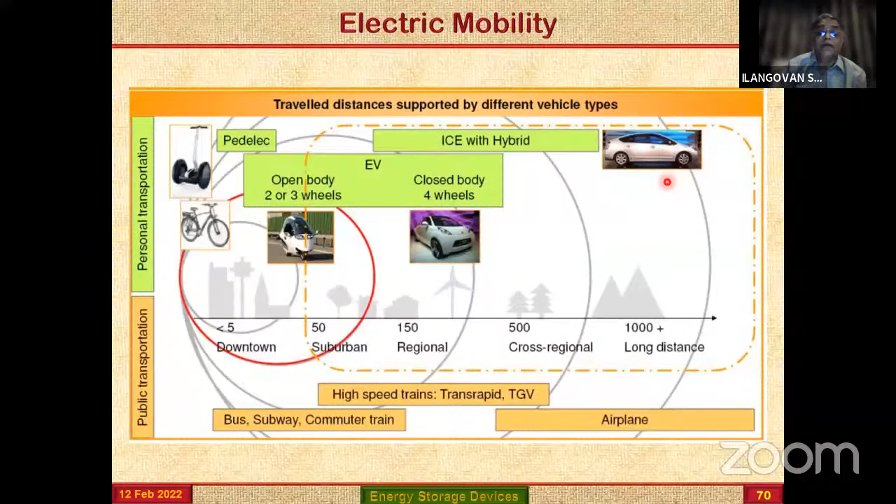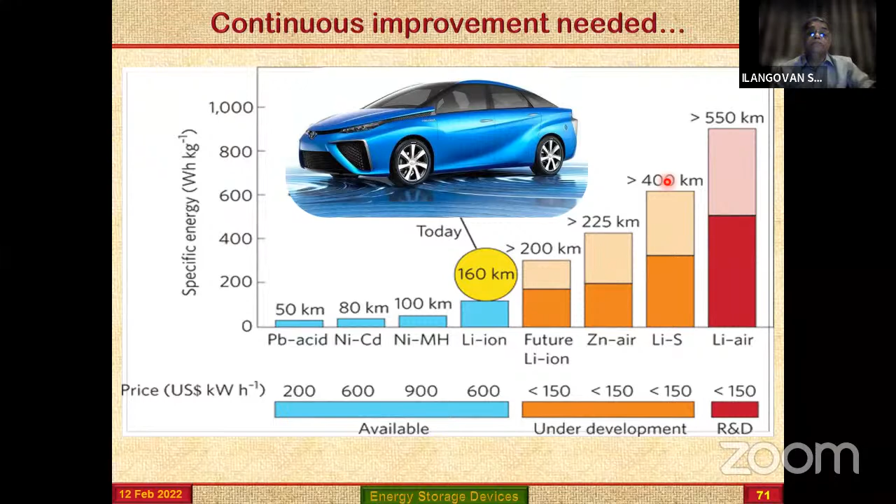With that, our initiative from cycle to 3-wheeler to 4-wheeler to car and long distance aspect - by increasing the energy density, by increasing new materials capability, we will be able to do it, and cost-wise we will be able to bring it down with the different systems that are coming up. And lithium, definitely it is going to be a problem for the future, so sodium ion system is coming up. Conceptually, if a battery and a supercapacitor - carbon-based, metal-based, or battery-based supercapacitor - if I am able to combine, whatever be the type of battery, we will definitely be able to sustain. Increasing the energy will increase the capability, and the cost affordability will increase. So this is the story.

I think we have come out with new devices, and we are also working on hydrogen cells, which are going to be the next generation beyond batteries, wherein water will be the product, and gaseous hydrogen as well as oxygen will be the reactants in fuel cells. We are at a preliminary stage, and we are going to come up with this. Once the battery and lithium ion kind of issues come up, by the time we will be ready with our fuel cell, wherein we will be able to supply. And again, the supercapacitor will form the parallel capacitor in between these, so we will be able to meet the need. Otherwise, hydrogen storage issues and hydrogen safety issues are there now, which we are trying to overcome. Maybe in a few more years we should be in a position.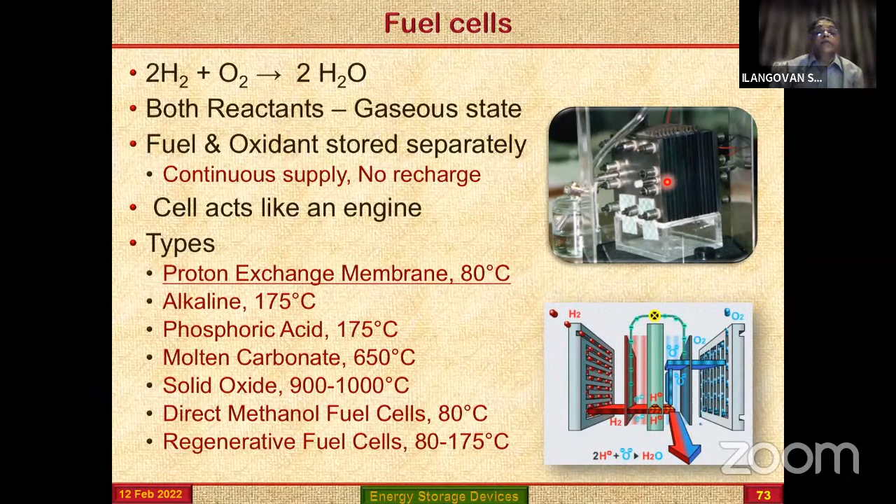Variety of fuel cell systems are available. Proton exchange membrane, which operates at 80 degrees, is the one more promising, and solid oxide fuel cell is also coming up well. People are also looking at alkaline, but the concept is the same - hydrogen will be supplied, oxygen will either be taken from the air or separately supplied. Yet another concept now coming up is the hydrogen economy based on solar energy - generating hydrogen using the fuel cell in the opposite way, storing the hydrogen and pumping it whenever needed for fuel cell operation, so that the total process becomes green in nature.

And there are some kind of flow cells also for stationary purposes. We are using it, and we may be going to install also. It may not be used for space applications, but for this one, it will be.

So what I'm trying to say is whether we have overcome the energy storage challenge in electrochemistry systems or not. When I look at it now, the battery has low kinetics and the rate will be a little slow, but the advantage of increasing energy possibility still exists, and we are working on it. The capacitor portion is the one which will bring out the power, and hybridizing it with a battery will make them more and more complementary to each other.

So the supercapacitor is the device that will actually improve the life, bring down the cost, and maintain better reliability as well as sustainability, coming up from the supercapacitor-based system in addition to our electrochemical systems.

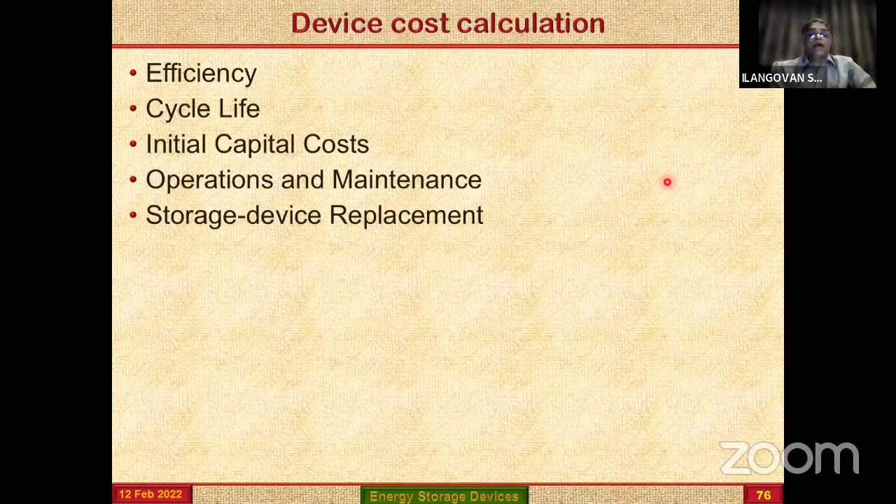Definitely, new materials for the anode or cathode, or ionic liquid based things, will be a continuous process so that safety issues are solved and energy availability per unit area or volume keeps improving. But still, when we look at the cost calculation now - efficiency, cycle life and initial capital cost - we are still not fully aware.

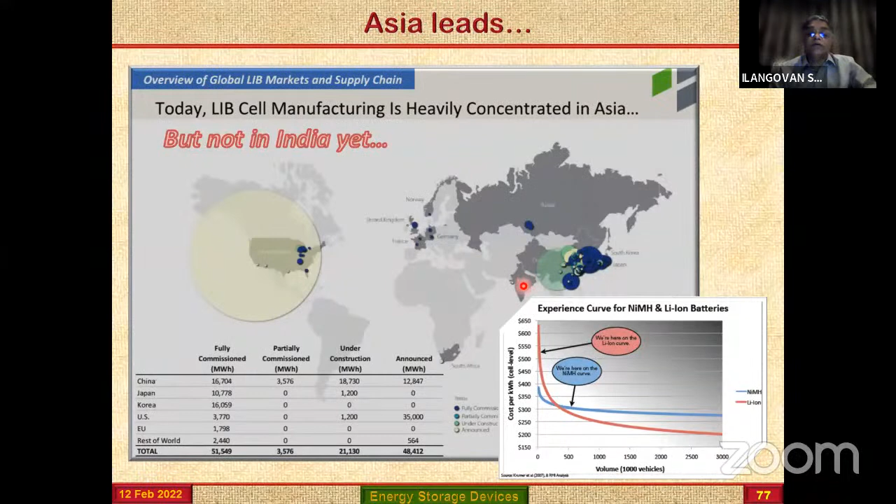All are individually set up - like our Maruti car has a separate unit, Honda car has a separate unit, Toyota has a separate unit. Because of that, the cost portion is still high.

Unless we go for a strategy wherein, while maintaining the demands, we make the materials as well as do the manufacturing within the country based on indigenous technology, that will be the thing. So definitely science and technology have to go together - our engineers are playing a great role in seeing that science is put into technology and a cost-effective, reliable system comes out.

So we have a lot of activities. That's why it is the right opportunity for me to look upon the engineers to bring up the science as well as the technology portion for the application.

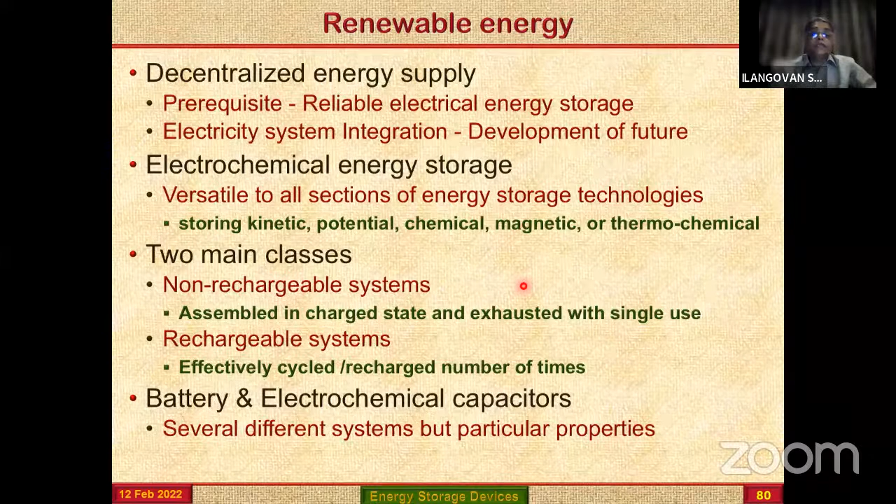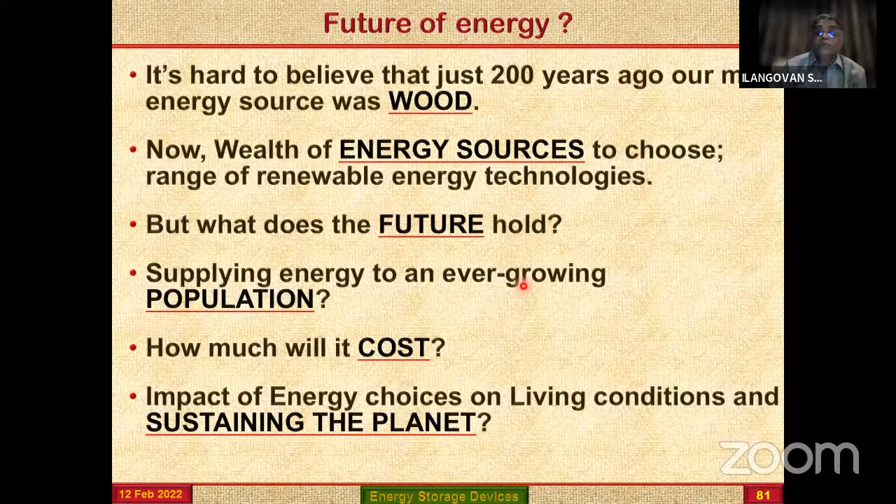So it is about how to bring down the cost, definitely sustaining the planet from the problems of pollution. We have to definitely look upon indigenous purposes. Only then will we be able to meet the future requirements.

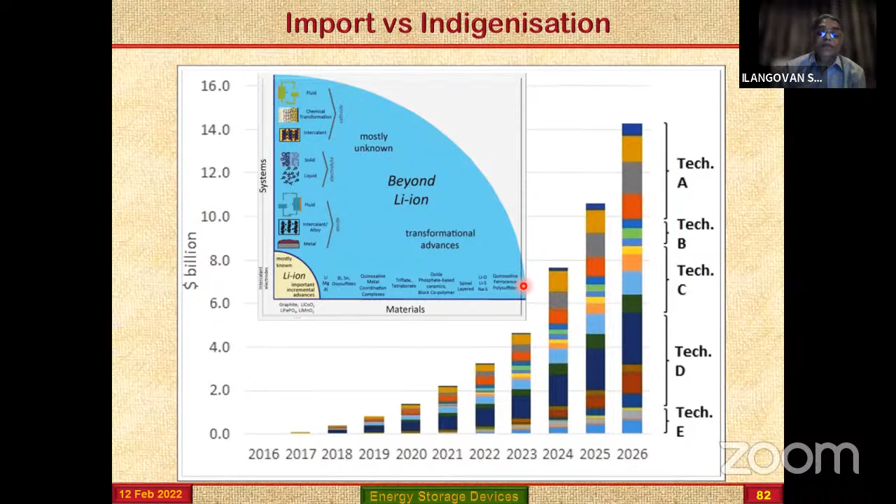So import versus indigenization - if you look at it now, when there is technology A, they will only be giving technology E. And if they are going with technology B, then they will only be giving the lower technology. Definitely, if you are importing the technology, we will be second or third only - we will not be touching energy efficiency on our own. So now indigenization is the main key.

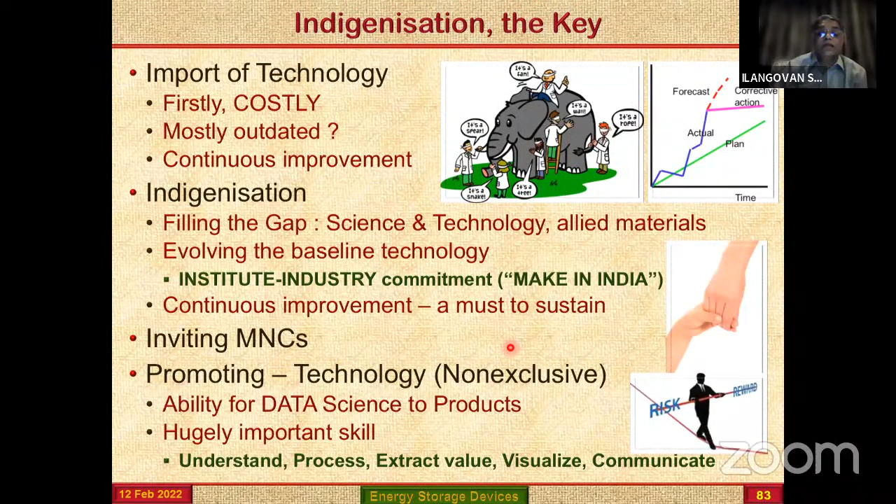Our R&D wing plus institutions should come forward to take up research problems which can be affordable for the country, and not only concentrate on publishing papers and going abroad. They should also concentrate on bringing up indigenous technologies that are available for the country so the country is prospering. This jinx of the industry and academic gap should always be addressed and brought down.

Now, industry and academia in our country have a big gap. Whatever the academic people are publishing is not available to the country for making into small technologies. This aspect has to be brought down. Once we bring it down, automatically Make in India will go up, and empowering, developing employment, and indigenizing will happen in a free-flow manner.

So automatically, we are thinking that ISRO's plan will leave some of the world countries surprised by bringing out more technologies and making access to space very low cost. This means the economy will improve, and we will also be helping other countries.

In summary, let me summarize it. The battery will take care of the high energy portion, and the supercapacitor will take care of the high power. When I combine the device into a single one, the supercapacitor becomes the combined form of energy as well as power, thus reducing the size and mass, and improving the run time as well as battery life. Efforts on energy density and power density will continue.

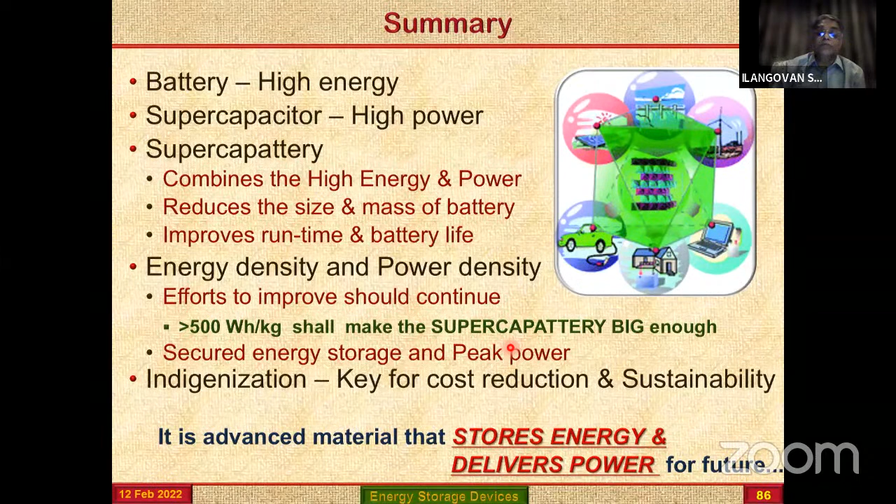If you are touching 500 watt-hour per kilogram, the power requirement of 2,200 or 2,500 will be easily met, and the supercapattery will be acting to fulfill that requirement, with secured energy storage and peak power available. With indigenization in place, it will become key for cost reduction as well as sustainability. It is advanced materials that India has to develop, so that energy storage becomes very efficient and power is delivered for the future.

With that, we will be saving on the perils that still affect our villages — more than 15 to 20% of villages are yet to get electricity, and people are studying with small lamps.

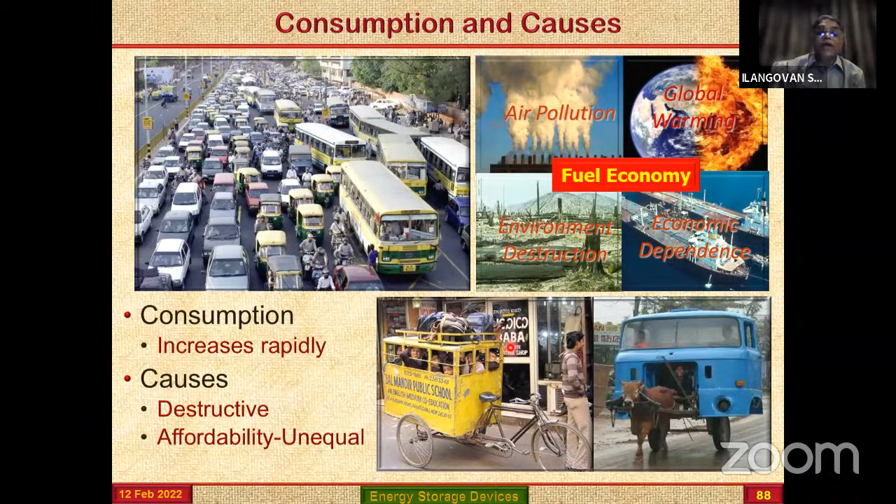This kind of technology will also be useful for traffic issues and other imaginable applications. Still, people are having bullock carts as well as cycle rickshaws. If battery can be made an affordable thing, we will be meeting this dream, as well as helping with climate change for all over the world, not only in India.

Carbon dioxide emissions — we need to address deforestation and wood-based requirements that evolve carbon dioxide, and this should be brought down. These are all greenhouse gases. From dry land, we should be able to create oasis by consuming the carbon dioxide, so that the water level is also taken care of.

If you look at it, India is not part of the red zones where greenhouse gases are coming up — other countries are doing that. At least with this technology, if we are able to export it, we will also be helping them.